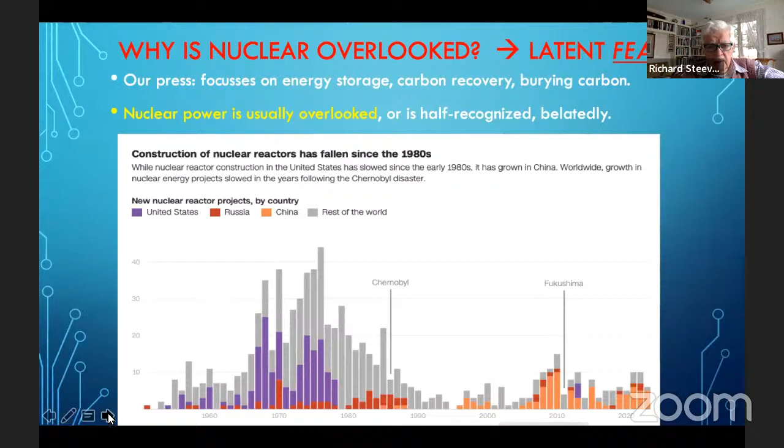So it shows that nuclear power really has been overlooked, partly because we haven't been doing any building. The rest of the world has, but we've been frightened off. Not quite sure why we got so frightened, but I wanted to share this with you rather than put it in some table. I'd like to use the actual wording that I got from the American Nuclear Society. They say, we let politicians get in the way regarding recycling and a repository.

And let me just read this. The Nuclear Waste Policy Act of 1982, called appropriately NWPA, codified our Department of Energy's responsibility for developing a repository for used nuclear fuel. 20 years later, the President and Congress approved Yucca Mountain in Nevada as a site for this repository. 8 years later, however, the Department of Energy shut down Yucca Mountain without citing any technical or safety issues. In contrast, decades of scientific study had consistently concluded that this proposed repository could safely protect future generations.

Now, by that time, in 2010, $12 billion had already been spent on Yucca Mountain, and 65,000 metric tons of fuel were in temporary storage at 39 states across the country.

The plan was to move some of those to Yucca Mountain. Many of us who knew the value of this weren't too bothered by that, because it might have been hard to get it back once we got Generation 4 reactors, which could consume this so-called waste—which is only 2% spent fuel.

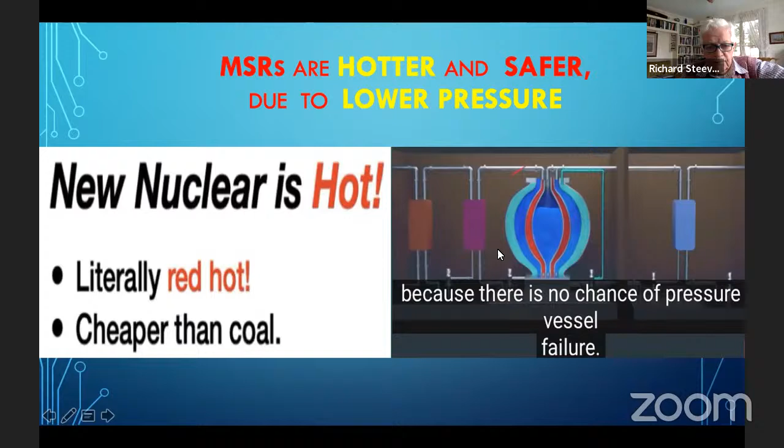So, oh boy. So, John, I'm giving a lecture, call you back later, bye. I tell you, calls. Okay.

As the molten salt heats up, it expands. Now the pluses and minuses here are not charges, these are just different signs for different atoms dissolved in the molten salt, which is generally a lithium fluoride. The point is that everybody's used to thinking of the solid in the water, but once you dissolve the fuel into a molten salt, it's a very natural thing. As the temperature goes up, the particles get a little more agitated and they move apart. As soon as they move apart, the energy falls off with the square of the distance, and so you have a natural cooling effect with increased temperature.

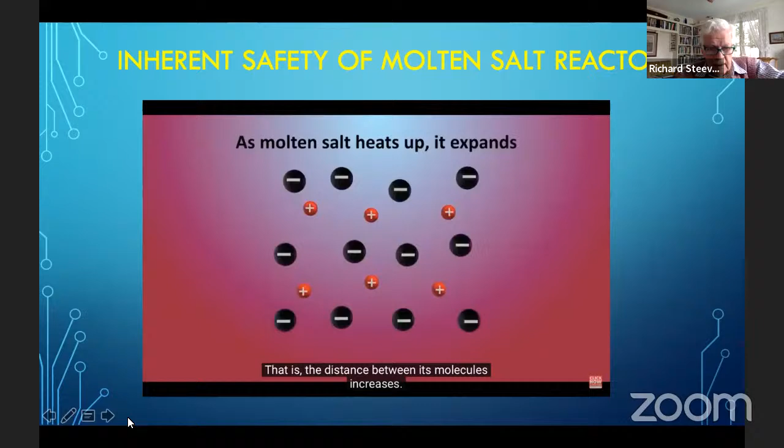This is remarkable - there are other safety things built into light water reactors too, don't get me wrong, but the liquid nature, plus they have a frozen plug at the bottom, means if you lose power, the frozen plug melts and everything goes into a cistern designed to contain it safely away from the reactor. There are all kinds of safety features built into molten salt reactors that people sometimes ignore, but it's a wonderful feature.

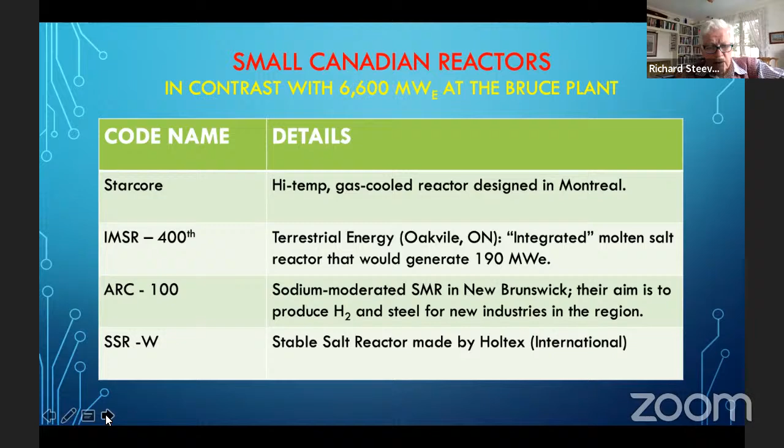Here's some small American reactors. Here's the Voyager by NuScale in Oregon. It was the first to be licensed, but doubling of concrete costs hurt their plans. They're planning on laying off 154 workers this year - really a sad story of poor planning.

Here's the other one I showed you the picture of, the BWRX by GE Hitachi. I don't see that - there we go. Pardon? I didn't see this slide come up. Oh, okay, glad you have it now.

Darlington has ordered four of these reactors on Lake Ontario. That's nice.

Here's Holtec again - they've got the 160 small modular reactor. Two units are going to be built for Palisades in Michigan, and that's exciting news. That plant has been shut down, and hopefully those two small modular reactors will clean up things a little bit in Michigan.

Westinghouse has one - they've got a tremendous history. They say this is the most advanced of all SMRs. Of course they're going to say that - maybe it's true. We're going to talk a little bit more about the Hermes project. This is supported by the Department of Energy and Kairos, and they've got some work going on at Oak Ridge.

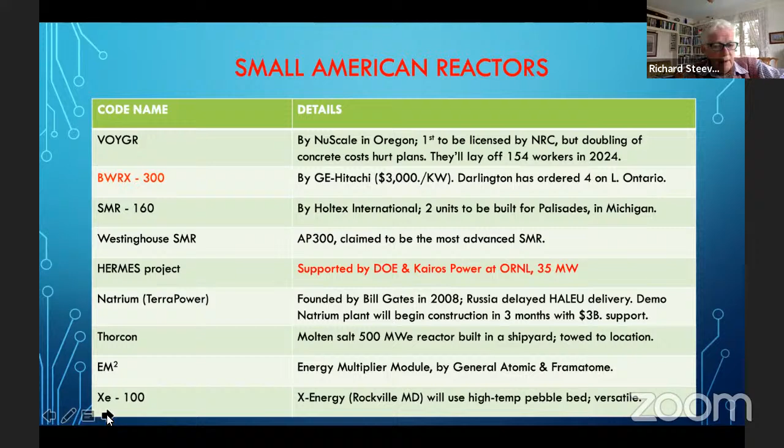The only problem is that when they get down to a certain level of radioactivity, you just ship them off to the company, and that sounds like, well fine, let the company deal with it. But the problem is it takes time, money, and energy to recycle the radioactive material in those pebbles. I have never yet seen anyone seriously discuss the amount of energy, time, and cost of that procedure. They just seem to think it goes off to heaven or hell, depending upon your point of view, with the heat, and recycle it. But there's not much described, and I'm not very happy about that.

This is from a talk that I attended by the Idaho National Laboratory. And you can see the state where this went on in shadow, and you can see there's a lot of things going on in Idaho. This Hermes reactor, I'll show you where that is in a few minutes.

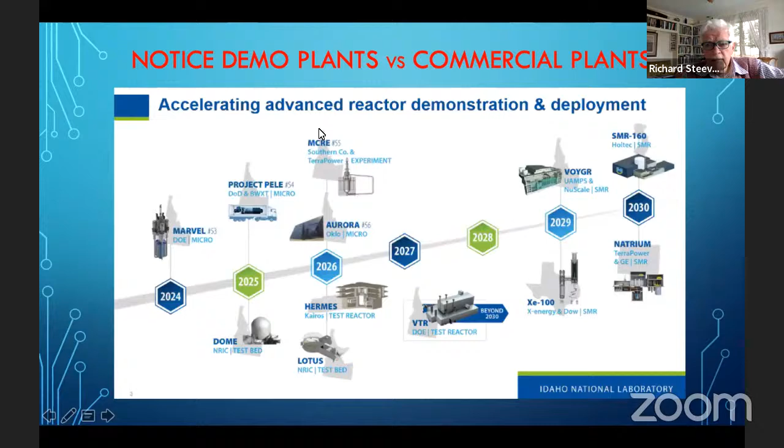Here we are with Idaho, but you notice the title is, notice these are demo plants. They're not commercial plants. They might start to get commercial as you go over to New Jersey here, Holtec has an SMR 160, Natrium, of course, out in Washington State, and XE 100 is in Texas. Most of the rest of this is all happening at the Idaho, and most of this is all demonstration plants. And so it makes it look kind of good. You say, oh, all this stuff is happening, but it's half a decade away before things really might start getting commercial. So it's not perhaps as fast as we'd like to see.

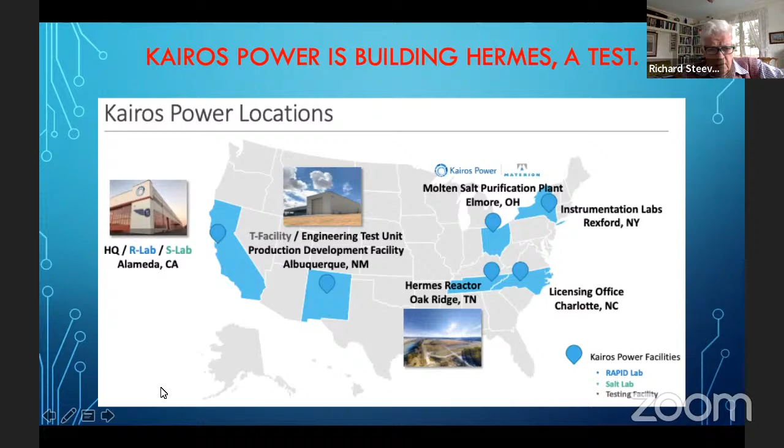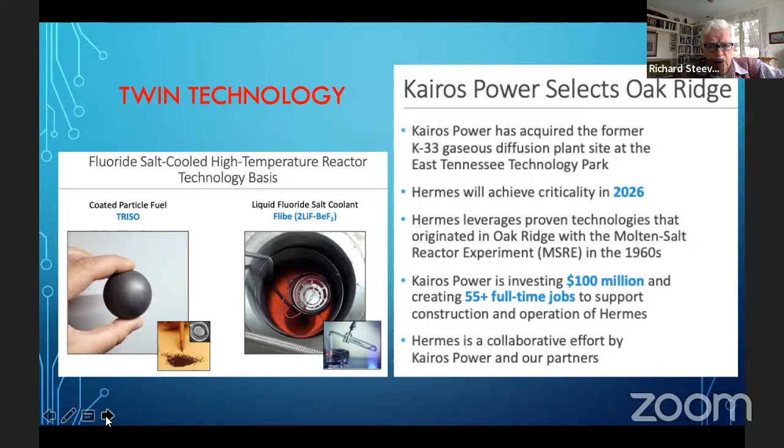The other thing that disturbed me a little bit when I was listening to them, they talked about these coated particles called TRISO, and then they talk about using liquid fluoride salt coolant. I don't know why, I can't imagine why you'd need to use both simultaneously. Maybe they're using some reactors with molten salt, and maybe some are in TRISO, but they didn't distinguish clearly between the two. So I found the talk rather confusing, and I'm sorry to confuse you as well, but there's these demonstration plants. We need to learn a lot more about them, and hopefully they'll come out with something useful. But I don't see that these two modalities need to be used together.

Just touching on Europe, Rolls-Royce put out some really interesting looking reactors 4 or 5 years ago. When I was talking with Ryan Pickering, who's joined our Rethinking Nuclear group, he presented some community nuclear power data, which I'll show you in a minute. He was over in the UK, and he said, well, Rolls-Royce is still thinking about it, but it seems that this community nuclear power is moving ahead more quickly. There were a couple of companies in France, Nuward, this is a large company in France, Électricité de France, and they will create from old pressurized water reactors a new small modular reactor, hopefully more efficiently than NuScale did.

And Jimmy Energy, funny name, they will industrialize their micro molten salt reactors in a couple of years. So that's a little ways away.

I have a Dutch friend, and I asked him to research this group. It's called Thorizon, and they've received 10 million euros from France to develop a molten salt technology that will fission waste specifically, using thorium fuel. So that's interesting. I'd like to see how that group goes.

Then Sweden has a reactor, lead cooled in this case, and then STAR, which stands for Safe Tiny Atomic Reactor. It's considered by some to be the safest and smallest reactor in the world, available for private and public ownership. That's intriguing. Wouldn't you want to have one of those in your backyard?

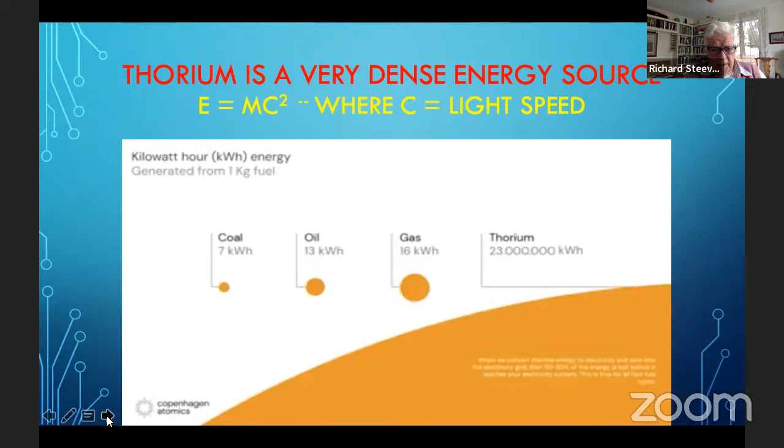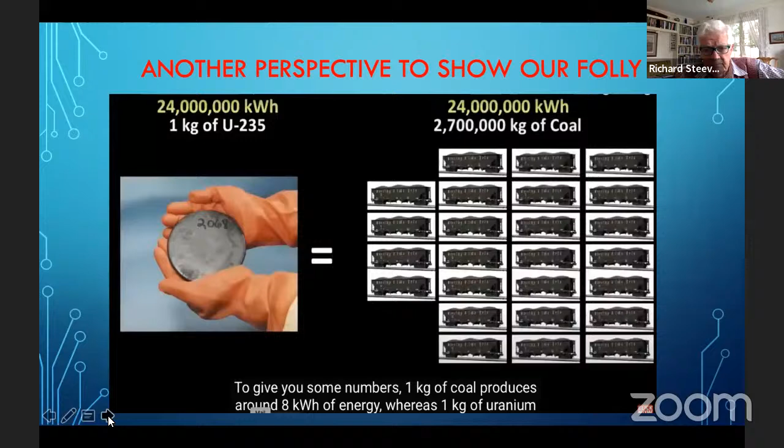So this is a dramatic difference, and yet we are doing this in Wisconsin, hauling train loads of coal all the way from Montana and other parts west. We continue to do this 20 years after we knew better, and still doing it today, while talking about putting up solar panels and wind turbines. We're not in Wind Alley, so we have to have these long grid wires crossing us from Minnesota and Iowa. It really doesn't make much sense to me.

This single ball of thorium metal can provide you with all the energy you need for your entire life.

We believe the future for nuclear, says Jam, is because mass manufacturing of small reactors with extensive quality checks is a good way to go. And he thinks he'll be able to make more than one reactor per day. This is a pretty amazing statement—we take 10 to 20 years to build a reactor.

Korea's got it down fine. We say it takes them 5 years, and we salute Korea, South Korea. But this guy is talking about doing one reactor per day. That's a pretty remarkable statement. I don't know if he can come near it, but even one a year would be a big improvement.

Then he makes some interesting remarks about thorium. He said thorium is the only element that allows for a breeder reactor in a thermal spectrum. We know some of that from remarks we've already made about Pennsylvania. This means that the power output per kilogram of fissile inventory can beat any other reactor.

Jam is a great guy for saying that it's the greatest game in town, and that it's a game changer—a word he likes to use. He's given a lot of talks, and I guess he gets hooked on some phrases. But this is interesting too.

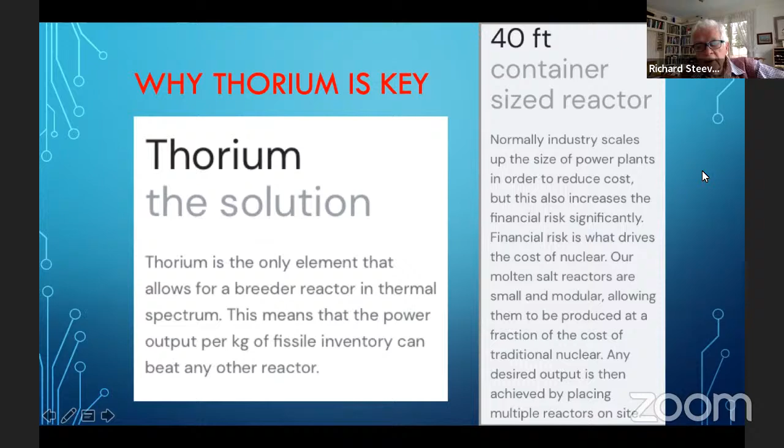If I have that, I'll send it around. What I'll be able to send you is the uranium one. I'll have to dig around—give me a few days. No, that's not a problem. Okay, thank you.

This is just the fission of thorium that leads to U-233. So thorium starts down here and goes up very quickly. It converts to thorium-233, hit by a slow neutron, quickly converts to protactinium, a short-lived intermediate. After about 30 days, it goes to uranium-233, which has a totally different disintegration pathway than 235. You get a slow neutron, but it fissions with high probability, gives off about two and a third neutrons on average, and makes the chain reaction possible.

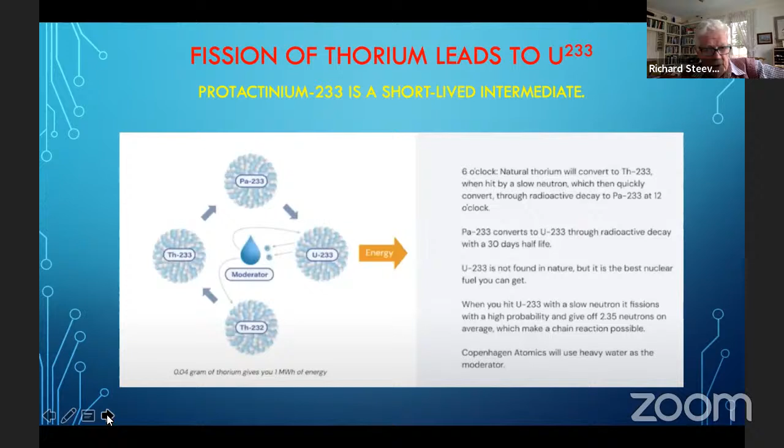Copenhagen will use heavy water as their moderator here. That's all I'm getting into, because we're already an hour into our talk, and I welcome the questions—they're interesting—but let's move on a bit. It's going to be pretty easy from here on.

Jam has likened his plant to building a house, which I thought was interesting. He's got different stages—some are 11 years, most are 3 or 4—and he talks about which ones are done. This one is 95% done, the technology foundation, and it gets down here.

The whole idea he wants to get across is that in most places, particularly the United States, we're waiting and waiting for the Nuclear Regulatory Commission, and so we get stuck in this technology thing and spend all our time there. Meanwhile, if the NRC delays things, we run out of money and fold. Whereas he's able to move ahead since he doesn't have the NRC to deal with, so he builds a non-radioactive prototype reactor, and he's been busy doing that for the last four years.

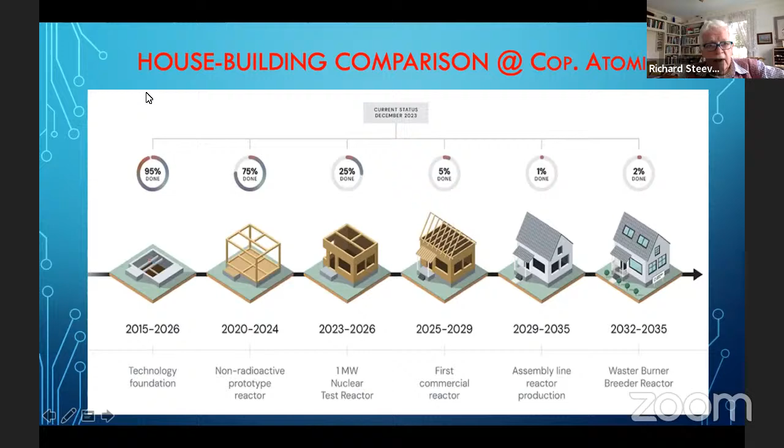Next year he's going to build a 1 megawatt test reactor, not 100 or 1,000 megawatts, just 1 megawatt. I'm not sure if he'll be able to do that in Copenhagen. He might have to move out of the country for that. He's still negotiating, I think. Then he wants to plan ahead for a first commercial reactor and an assembly line. Whether he ever gets there or not, I don't know, but I'm intrigued by this fellow because even though he's a little weird in rejecting climate change, he seems to have an idea for keeping his company afloat.

The output of some of his preliminary reactors would be thermal 100 megawatts. Temperature of his system would be 560 using heavy water. His target price is $20 per megawatt hour. That's a nice low figure, we'll touch on that later. His first reactor will only produce 1 megawatt sometime next year, he's hoping.

He says it's green electricity at prices below any other energy technology. He says our waste burner can get 10 times more energy out of discarded fuel from classic reactors. He says 10 times more, but he doesn't say then what - I think he means other reactors, but he doesn't quite say that. We build, own, and operate reactors. This is the same as Rosatom in Russia - they build, they own, and they operate. That helps smaller Western European countries who haven't got that expertise yet.

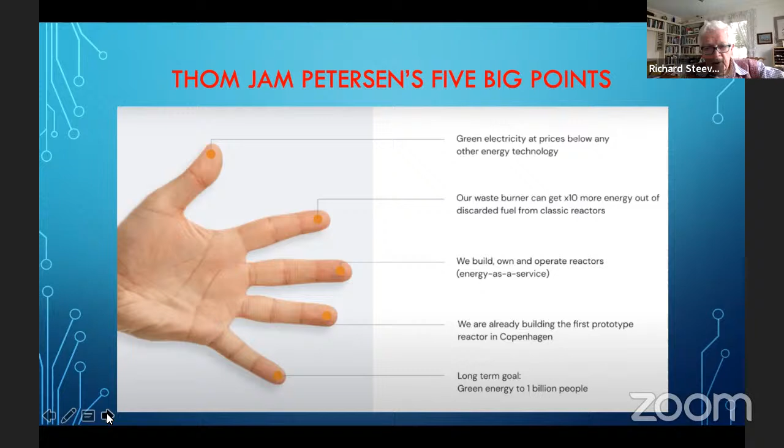So this is important. We've been talking about this myth of corrosion in molten salt. 2,000 hours in purified and unpurified fluorinated lithium, sodium, potassium salt at 600 degrees centigrade. Here is the raw unpurified salt, and when he uses it in ways that would be used in a reactor, it goes to this - not so good. But when he purified the salt properly, he gets this, very low corrosion rate.

Well, that was fine, but I just read yesterday, let me read this to you. At MIT of all places, their approach was to use accelerated protons to mimic the impact of neutrons. You don't want to use neutrons in a test facility in the middle of a university - that would be dangerous. Protons are very much like neutrons, and they're making proton accelerators. In fact, we're buying one at the UW hospital for treating cancer patients. So proton generators are not hard to find, and not too hard to use.

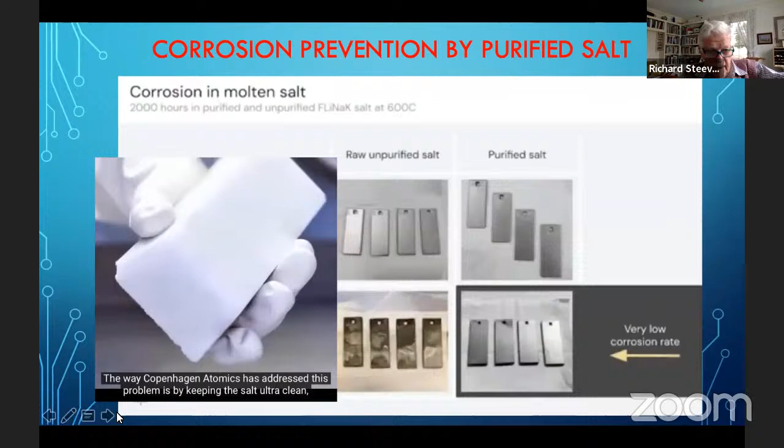They said, oh well, they didn't get corrosion, but we don't believe it - we think it corrodes like the Dickens. And along comes Jam, and he says it too, and nobody believes him. But I think MIT will be believed. I think it's pretty impressive.

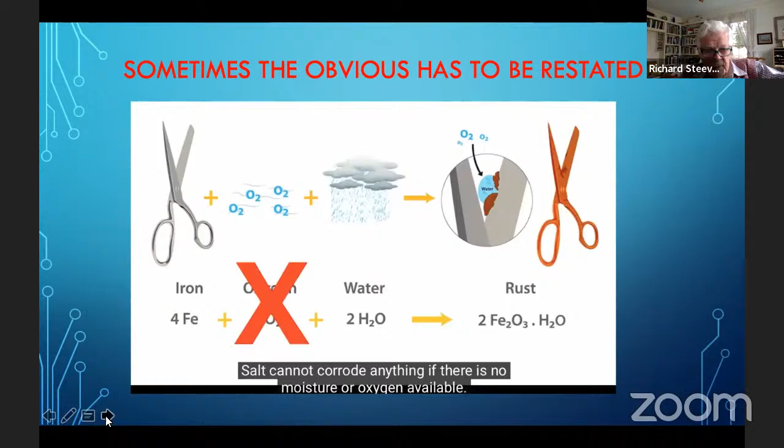Jam gets a little sarcastic here and says sometimes the obvious has to be restated. You take a pair of iron scissors in the presence of oxygen and moisture and you get rust, but you get rid of the oxygen, and even in the presence of water, you don't have much rust. I think they get rid of the water as well. He said purifying that salt was not easy; it took a lot of work to get all the impurities out of it.

Can I say something in here just for a second? Those big solar passive facilities that use mirrors to beam energy up to a molten salt vessel and then send it down to make steam—those things, their valves and their pumps were corroded, that's why they didn't succeed.

Well, that was oil, there were a lot of things in there. I don't think they excluded the oxygen. I don't think you can draw any conclusions from that, Lou. Well, I'm just saying maybe that created a lot of question marks about corrosion from that. But it's a maybe. This guy's got it solved, it sounds like. I'll take MIT anytime over concentrated solar.

Alan's got one little comment on anti-corrosive metals. Marine grade—I don't know the formula for it—but marine grade aluminum is highly resistant to sea salt. I don't know if this would apply to the molten salt reactors or not, but you can sail around the world many times in an unpainted aluminum sailboat and have no serious corrosion problems.

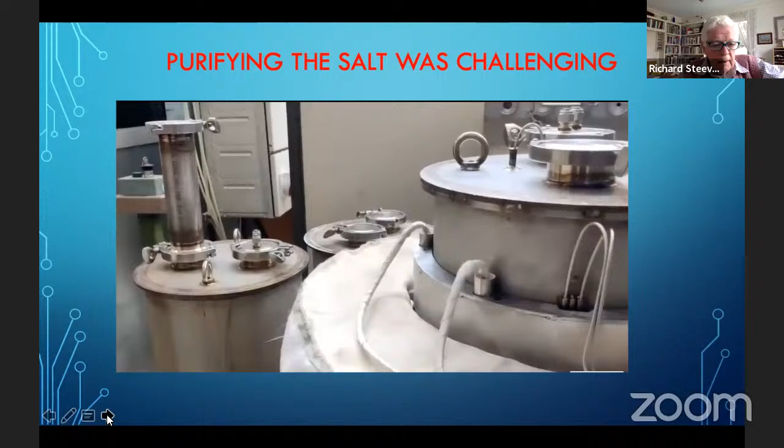This is their core. Basically the purple that you see here is the fuel salt, that is lithium fluoride, and it comes from above and percolates down. Inside here you have heavy water, and on the yellow you have a blanket of salt, lithium fluoride, at 600 degrees.

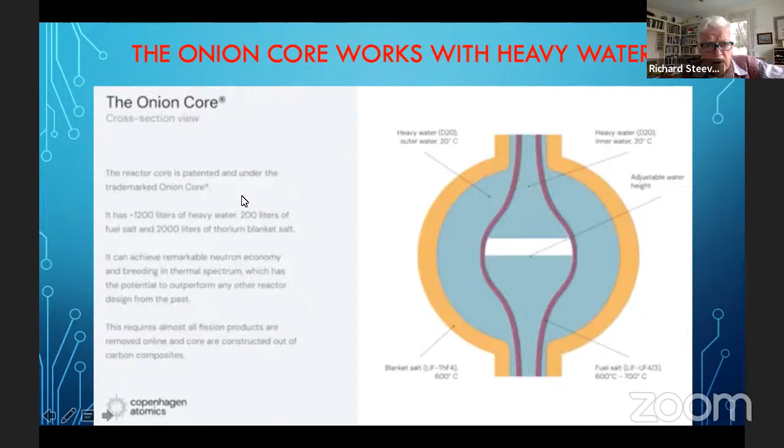So I don't fully understand this. They say the core has 1,200 liters of heavy water, but they can reuse that—they don't have to keep buying it all the time. There's 200 liters of fuel salt, that means uranium and fluoride, and 2,000 liters of thorium blanket salt out here, and maybe that can be recirculated. I'm not sure of the details of the relationships here, it's just part of his talk, but I didn't get it all. I just show you for what it's worth.

These slides, I think I showed you last November, but I think they're kind of interesting. Each compares in terms of EROI, energy return on investment, for the light water reactor, and compares that with what he calls the waste burner, the liquid thorium molten salt reactor. He's got a greater than tenfold difference here, much greater.

He likens the waste burner to a jet airplane versus a uranium molten salt reactor versus a uranium light water reactor, and talks about the cost of mining, greatly reduced. Fuel production, no enrichment needed. Waste storage, 300 years as opposed to 100,000, because you get rid of most of the actinides and all you have are the fission products, which don't need to be stored so long. I think that's more or less true, but you still have some plutonium around, so ultimately you are going to need some storage. Energy price, he feels he can get tenfold below the light water reactor. Deployment speed, he thinks he can do that 100 times faster. And the maximum pressure, 1 bar versus 200 bars.

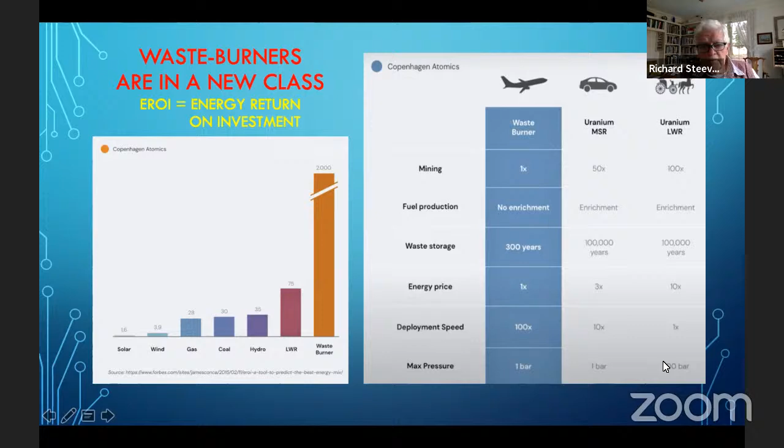So those are his slides from last November that I showed you.

I get his newsletter, and these are edited down, but I thought reading this one might be worthwhile. Many people claim that enriched uranium is cheap and it's not worth spending any time trying to save on fuel. He said this isn't entirely true. What is true is that classic nuclear reactors are extremely expensive on paperwork, on construction, and therefore in capital cost. Also, classic LWR reactors use uranium extremely inefficiently. 5% enriched uranium currently costs $4,500 per kilo. You can only burn a few percent of that in a solid fuel reactor.

In comparison, thorium costs about $50 per kilogram instead of $4,500. And in a Copenhagen Atomics waste burner, you should be able to fission, he says, over 95% of that thorium. This gives you at least 20 times more energy output per kilogram, that's thorium versus enriched uranium. But in US dollars, take the $4,500 per kilo, multiply it by 20 because you're getting 20 times more energy, divide by 50, the cost of the thorium, and you get 1,800 times more energy per US dollar from thorium.

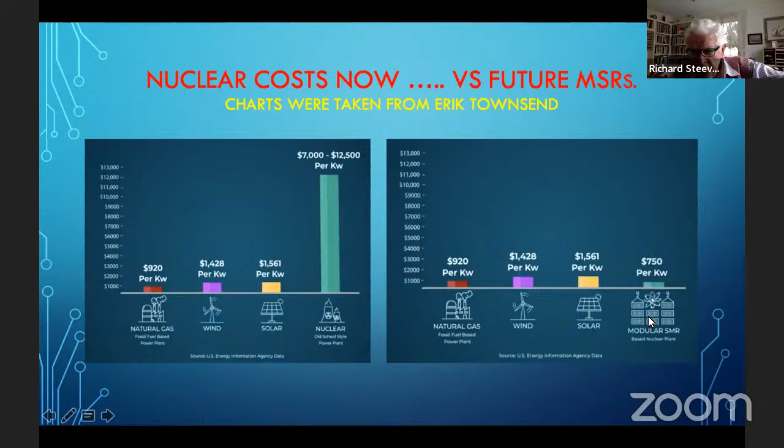On this slide, he shows the same numbers for natural gas, wind, and solar. But look at this, he's brought this down a factor of 10 with small modular reactors. I wish I knew how he had developed that slide.

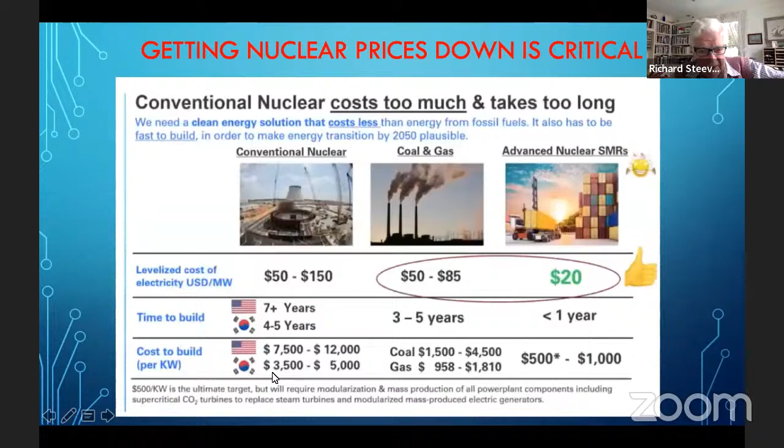We build our coal plants in 3 to 5 years, and this guy must have visited JAM because he says less than a year, although JAM builds them in a day, so he says. But anyway, I thought that was an interesting slide dealing with the cost.

Also, another slide was the SMR-based gigawatt power plant. This is the kind of power plant I'll show you in a few minutes. Basically, he's projecting a couple of years for rapid construction, less than a year to make ready-made reactors in shipping containers. Conventional plants have a 7 to 10 year construction period and a completion window way over here if we started to plan a conventional nuclear plant today.

So it does make us want to think about this. We're certainly not going to embark on these plans anymore, even after we finally made it with Vogtle. It was a long delay, and there are other examples around the world of similar delays. So I think we will be at least strongly considering thorium molten salt reactors.

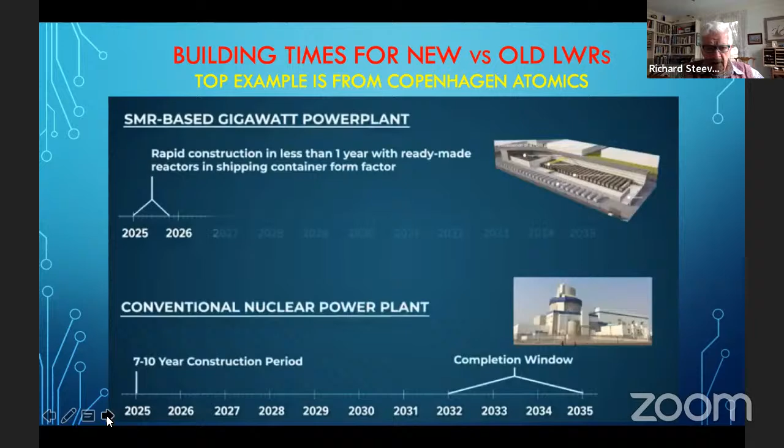They point out that it's not just the reactor per se. These are kind of steam turbines used today at nuclear plants and coal plants. They say they need to get the cost down with lighter and more efficient CO2 turbines. I don't know much about this, I'm sure some listening know more, but they're mentioning this as something that should always be factored in.

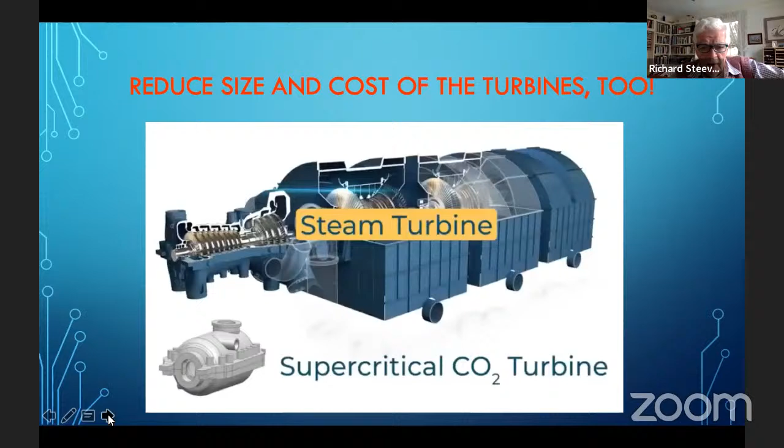JAM's view again is that spent nuclear fuel is worth more than gold. So if we put it deep underground, we'd be digging it up again within the next 100 years. Classic nuclear reactors have terrible fuel economy, using less than 1% of the uranium that's mined. New reactor types like Copenhagen Atomics need 100 times less mining than classic reactors for the same energy output.

He says it's not easy or very economical to use spent nuclear fuel in classic reactors. But if you separate the spent fuel in a chemical process first, and then use those transuranics in the waste burner, you get the highest efficiency of any reactor design.

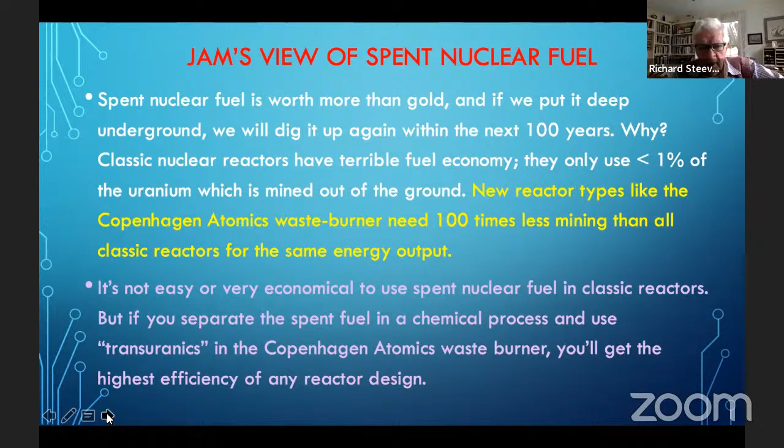And that purple print there leads us to some of his comments. This is his plan for recycling. We don't have any plans here significantly to recycle. Most of the other advanced countries using nuclear have recycled. We decided it's too expensive, we overlooked it, we kicked the can down the road, as we so often do.

But this is what they plan to do. They plan to harvest 95% of the uranium and ship it to the global market, because there's quite a market with other countries that will have their Gen 4 reactors while we sit and dither. The other 5%, they will store some of the fission products, because after 300 years it'll be relatively safe. The transuranics and plutonium obviously need to be stored longer, or they can be put back into the reactor and burned.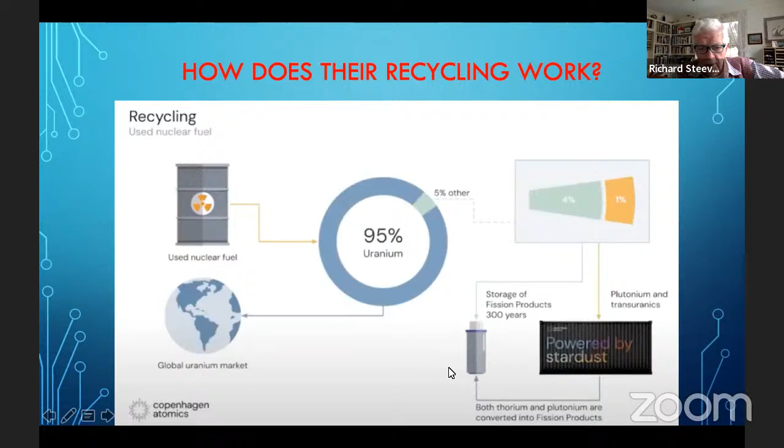So they feel they have built and tested more than any other advanced reactor company. They're running a 30-day reactor experiment, 10 times less expensive. What they're doing is this plan: they're following building and testing designs over time, as opposed to the Americans who are waiting for NRC approval.

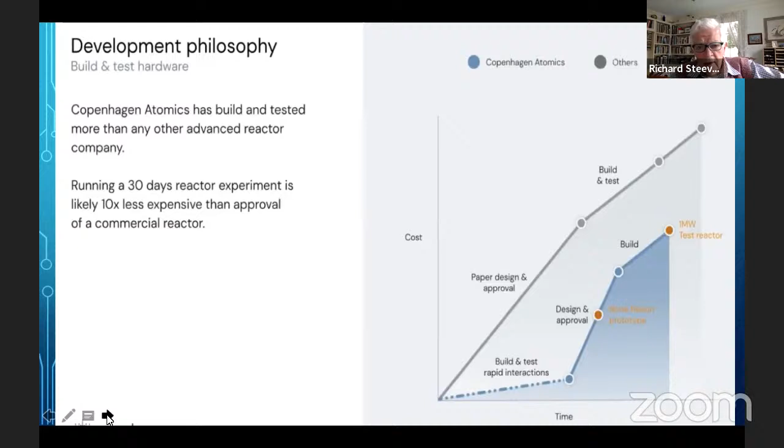They just do paper design for decades, and then finally they think they'll do some testing, which they're talking about doing now, and they might get there eventually, and they might not. So he's trying to show how they've cut their costs by designing and improving more rapidly.

Are you sure you're talking 1 gigawatt? That's a hell of a lot. Well, the South Koreans are building 1 gigawatt plants, aren't they? What are they building? I've never heard of gigawatt. 1,000 megawatts is 1 gigawatt. So 1,000 megawatts versus 100—you're talking a 10-fold difference in size. Yeah, but they're still using light water reactors in Korea, I believe. Okay, but I'm saying this wouldn't be at all the same.

You just saw pictures, well let me go on. I'll show you pictures of this thing. This is their company, a wide angle view of it. You're looking down two directions of a single hallway at some of these people planning their operations. They've got 60 people.

They have employees from 15 countries, 200 sub-suppliers, and 11 customers. They're making these pumps, molten salt pumps, and so on. They've been doing cumulative component testing equivalent to 70 years.

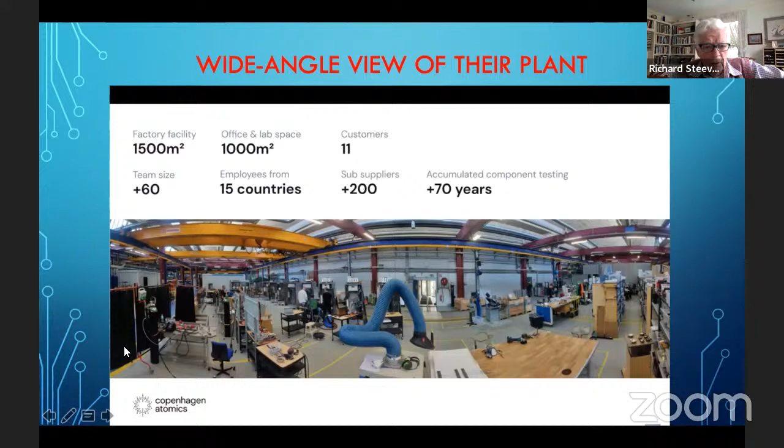These are the systematic testing of small pumps. They're building more durable pumps—the old-fashioned ones are up above. It's the most advanced loop lab test currently available, high temperature molten salt pumps, and so on.

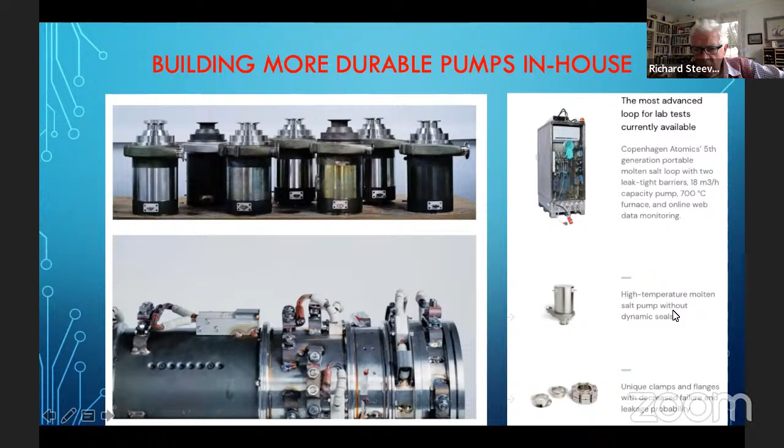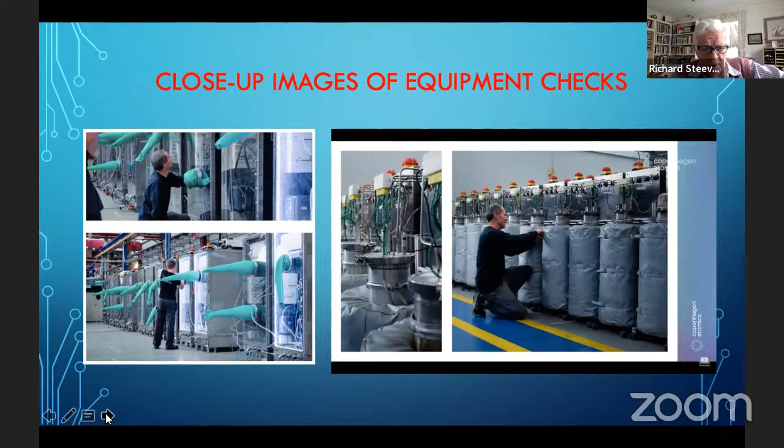So they're doing this sort of thing to be ready. Here they're doing equipment checks on various parts of the plant. They have 3 safety barriers here. This is a demonstration of the reactor and its safe levels of isolation from the public. This is another picture of their onion-like molten salt reactor, with 3 barriers mentioned, not pressurized, and so on.

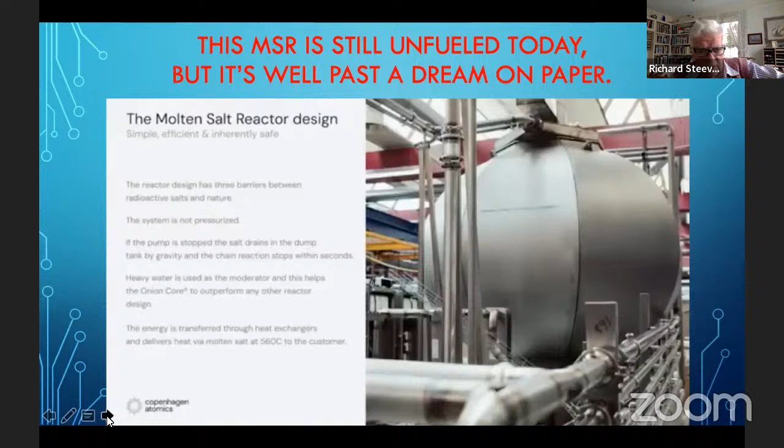I don't think you're comparing it to a gigawatt, but he does talk about going to higher levels later. This is the reactor being tested. They don't have any thorium in it yet.

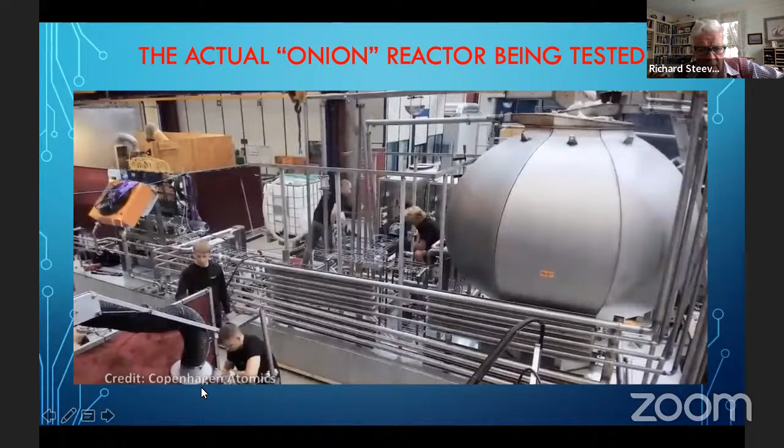They're just testing the salts for corrosion. I'm sure they're very well aware of what's going on at MIT.

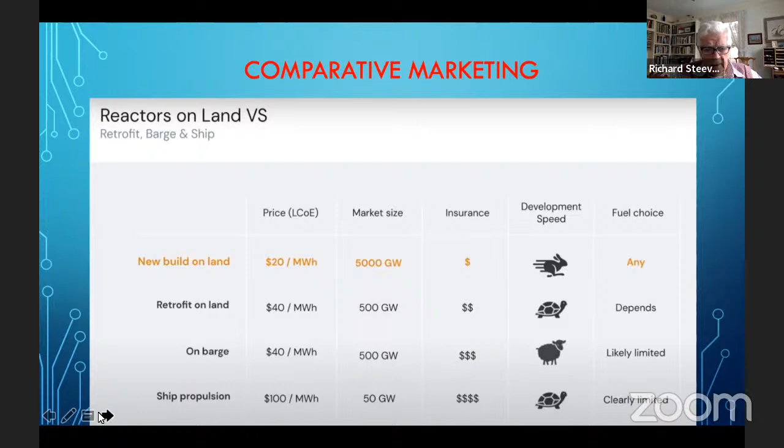But that's his view. He may be right in some of these, but certainly TerraPower—and this is the shipbuilding you were talking about in Korea—they have subholdings with Hyundai, and they're doing various research and exchange with TerraPower. So that might be what you're referring to, Lou.

No, I was just talking about you said 4 to 5 years to build a 1,000 megawatt reactor in South Korea. They probably have the best record of lowest time. They do, but yeah, there's a convention of building a 100 megawatt unit in a day. You said a day first, now you say an hour, but they can never build one of those in an hour—that's impossible, I don't see how they could. Yeah, I agree with you. But you're talking at least a 10-fold difference in size, so you got to take that into consideration. Sure, even in a day that's a huge feat to do. It is, absolutely. And this is the number I gave you in South Korea, that was for light water reactors. Yeah, okay.

Excuse me, could I ask a question? Sure. When you say it takes a day to build the reactor, is that true? I thought the factory was going to produce one per day. Yes, it takes much longer time to build it. Yeah, absolutely, so we shouldn't be comparing these things. I completely agree with you. Somewhere along the way in his stuff it came out as 1 hour. Yeah, I don't believe it for a minute. I would be most surprised if he did it in a day, let alone 1 hour.

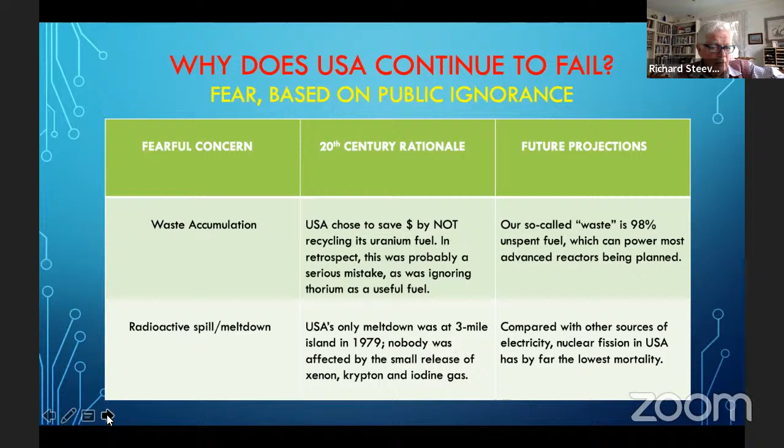Maybe there's an underlying guilt, as some people predicted would happen. I'm not sure, but we're a long way from seeing this in Congress. Somebody put up this joke where the president says to fast track the development, testing, and certification of fully automated thorium-burning, liquid-fueled, load-following molten salt SMRs. I thought, well, that would be nice, but I'm not so sure I expect it anytime soon.

If you start digging into the literature on molten salt reactors, which usually involves thorium, you come to two big problems. The first is corrosion, which hasn't been eliminated by any means, but it's still a problem. Some serious work has been done to reduce it. So many writers don't do any research to speak of, so they just dispense with it and say, well, we'll never have that problem because there's too much corrosion. The other problem they mention is an isotope of thallium. If you follow the degradation down the thorium pathway, it goes through thallium, which emits gamma rays.

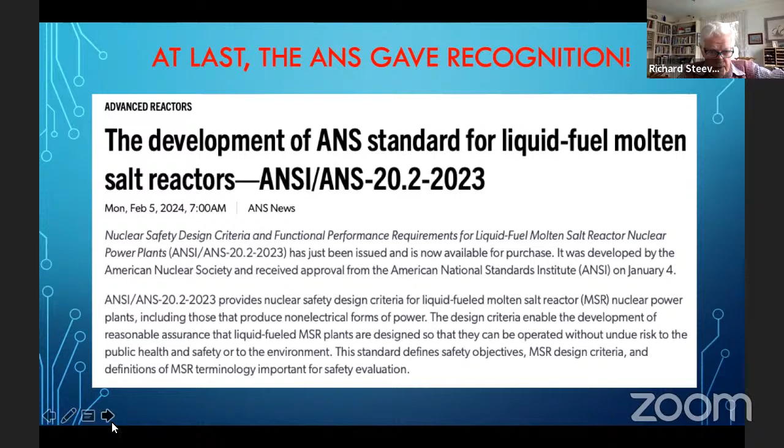What Bill Gates did say, and I reviewed his book with you, is that electricity generation and its immediate use in transportation are the low-hanging fruit. As we've been discussing for the past year or two since we talked about Bill's book, we find the low-hanging fruit is not very easy, and we're still struggling. Then when we look at the not-so-low-hanging fruit, like farming, forestry, and oceans, that's even tougher, and we've made very little progress there. So it turns out these challenges are really serious ones. At least this is a fairly upbeat book.

I think this one is probably more upbeat and less dreamy than the other, which I will now share with you, unless anybody wants me to stay on this. Okay, I will show you now this book. Let's see if I can make that any bigger. That's pretty good.